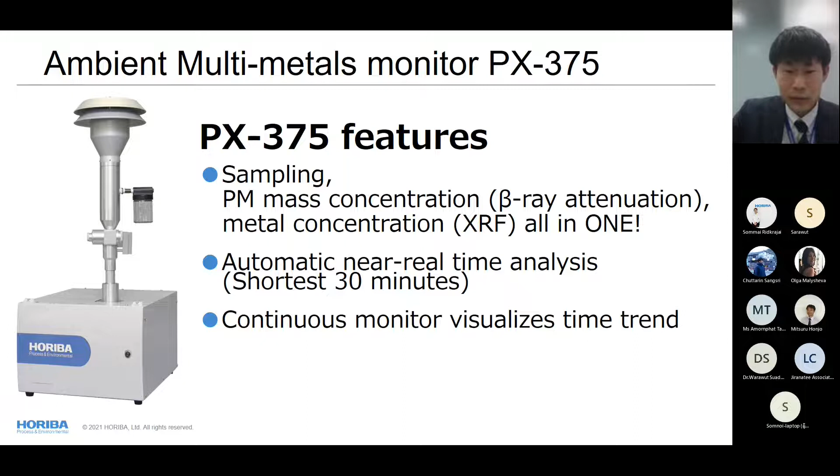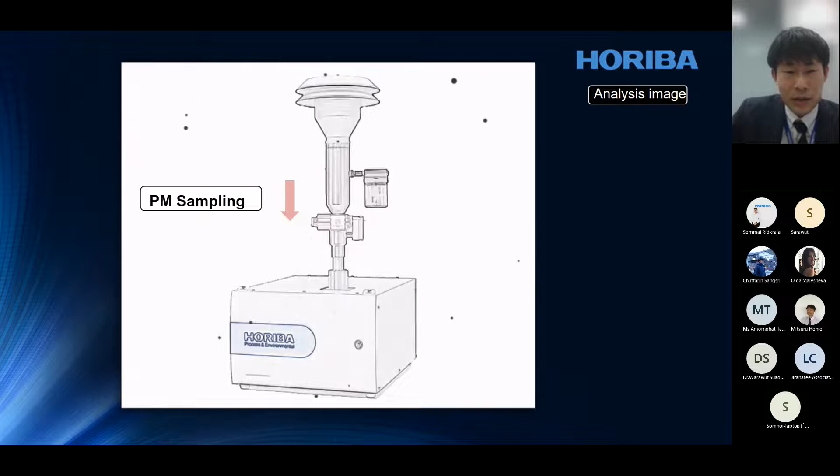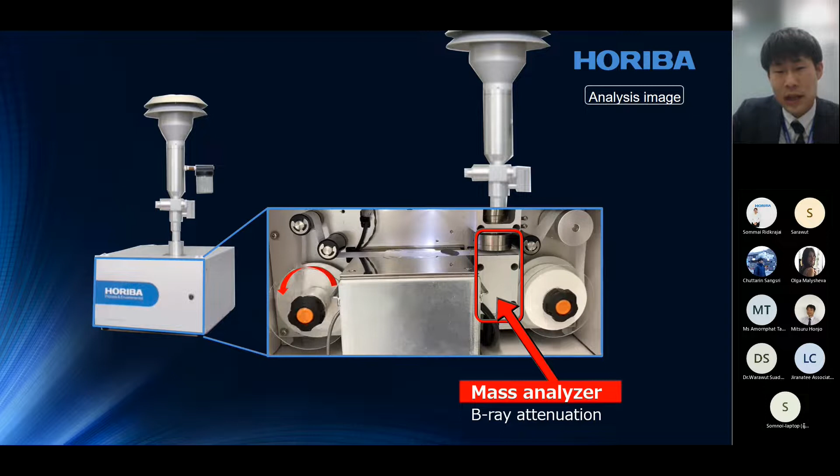Let's look at the animation and learn how the instrument works. There's always PM pollution in ambient air, and it's taken in from the sampling head at the top. Once the PM sample is taken into the instrument, it will be trapped on the surface of the filter tape. At this location, mass concentration is analyzed with beta ray attenuation technology. Then it's moved forward to the next position, where metal concentration is analyzed with X-ray fluorescence technology.

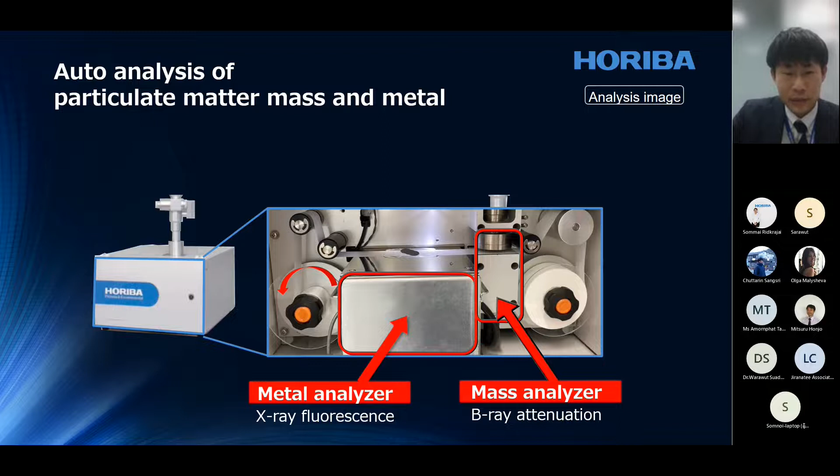If you install PX-375, you will get a lot of measurement data such as PM mass concentration and metal concentration. And if you also install other sensors like wind speed, humidity, wind direction, GPS, and temperature, you'll be stuck with tons of data.

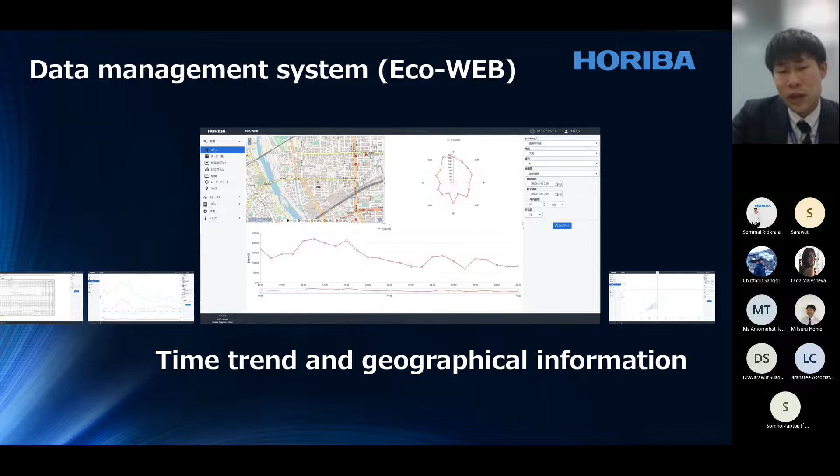And not just the instrument, we also have a proposal for a data management system, which is called Eco-WEB. With this software, you can check the time trend and geographical information too. Not just that, you can also show the time trend of multiple metals.

If you want to visualize the measurement data with the very manual method, you have to put all the measurement data into a CSV file format, and then you have to manually put it into graphs. It's such a time-consuming process.

You can also take a monthly report from the software, and together with the wind speed and wind direction measurement data, you can also visualize from which direction a particular concentration of metal is coming.

So if you put this data onto the map, you can visually see how much pollution is detected at the measurement site, and from which direction the pollution is coming. And then you can also check what facility is possibly causing the pollution in that direction.

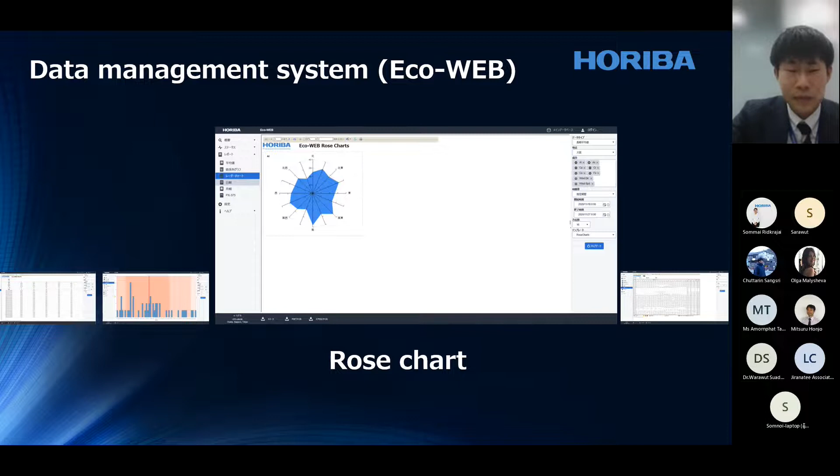Histogram data. And if you also want to put it online, you can get it online through Wi-Fi communication, and you can check this data all remotely.

Okay, from this slide, let's learn a little bit about how important the metal elements are in the total particulate matter. As you're seeing, particulate matter is composed of a lot of elements, and if you roughly break it down, you have ion elements, metal elements, and elemental or organic carbons.

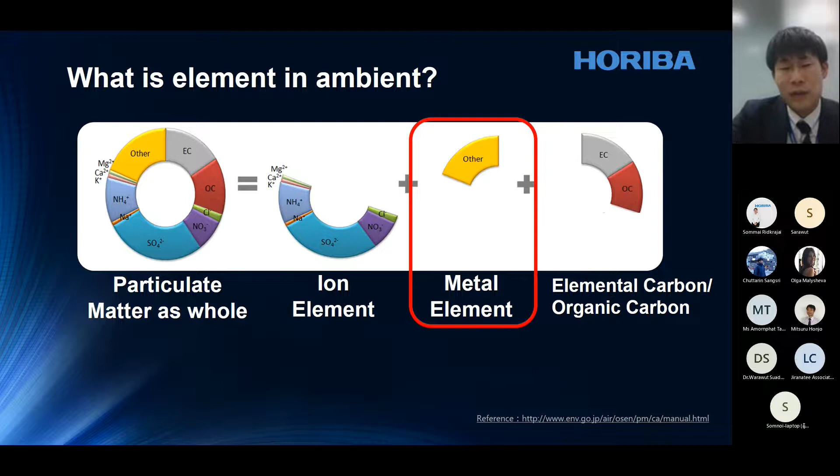The reason why PX is for metal analysis is that the metal component does not change its composition during transportation. For example, if you are monitoring SO2, the concentration will change over time during transportation, due to, for example, the sunshine effect and so on. But on the other hand, metal doesn't change its chemical composition during transportation.

So that's why they can work as good fingerprints for pollution source analysis. If the composition changes all the time, you have no clue where it came from. But if the composition doesn't change, that information is preserved from the origin of the pollution all the way up to the location where you detected the pollution. That's the very important point why we want to monitor metals in ambient air.

And in some studies, of course, the importance of metal analysis is already known. That's why other researches were taken before. But the method used for the projects in the past is very conventional.

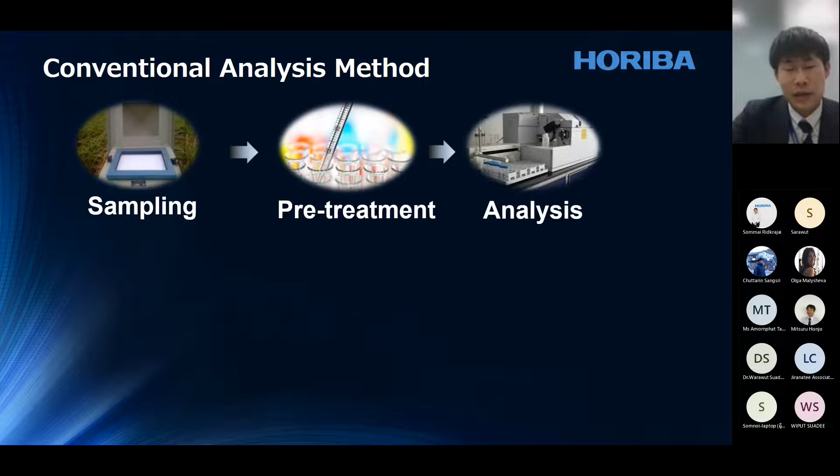For example, you have to have a sampling unit like the photo here, and then you have to take the sample on the filter and take it to a pre-treatment process. And then finally, you can analyze the sample. So as you're seeing, obviously it's an expert analysis. That's why it's expensive.

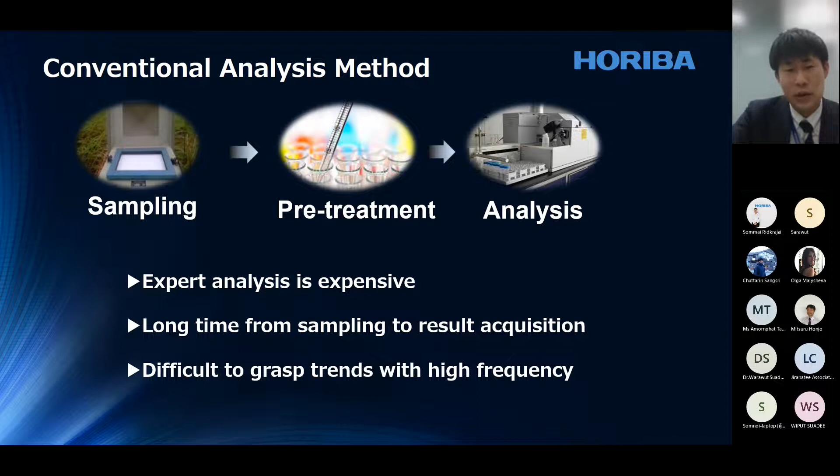It's very rare that you have the analysis instrument in your lab. So most of the cases, you have to take the sample and ship it to the analysis lab and wait for a certain time until you get the analysis results back. So this process is very time consuming. It normally takes about 2 weeks to 3 weeks. That's why it is very difficult to grasp trends with high frequency. The measurement frequency is a key point for today's webinar.

So let's look at the benefits of online XRF metal monitor. So as I explained in the previous slide, the conventional method used is ICP-MS in many cases. Time resolution wise, usually measurement frequency is 24 hours. In other words, you can only analyze one sample in a day.

On the other hand, with PX that equips XRF technology, you can analyze the sample every 30 minutes shortest. The good point about this is that you can analyze the trend of pollution by time of day. For example, in the rush hour, more vehicles are running on the highway than the normal daytime.

So there must be a certain unique rapid outbreak of a specific pollution that's coming from vehicles, for example, tire or brake. So such activity cannot be captured with a manual method, but with XRF online monitor, you can capture a short-term rapid increase in concentration.

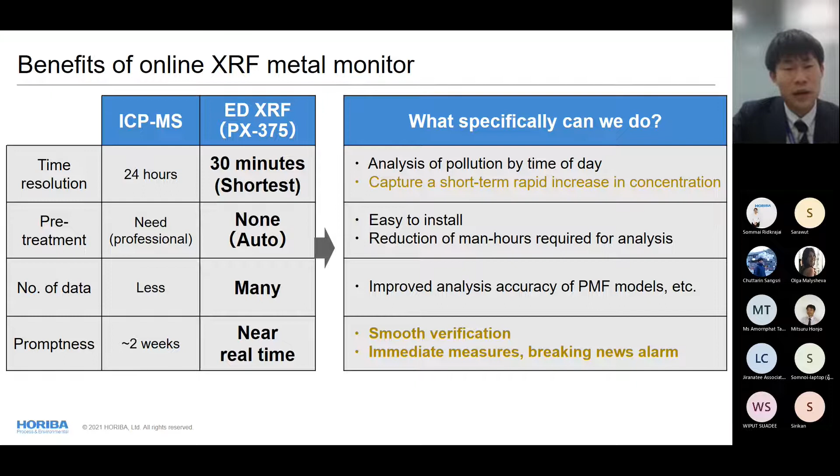For example, let's say you have an idea of a pollution analysis and you want to apply it. But if you have to wait for 2 weeks, the condition already changes and you can never duplicate the same condition again. But if you can get real-time measurement feedback, you can easily apply your idea and verify your idea quickly. So with the new technology, you can do something you were never able to do before.

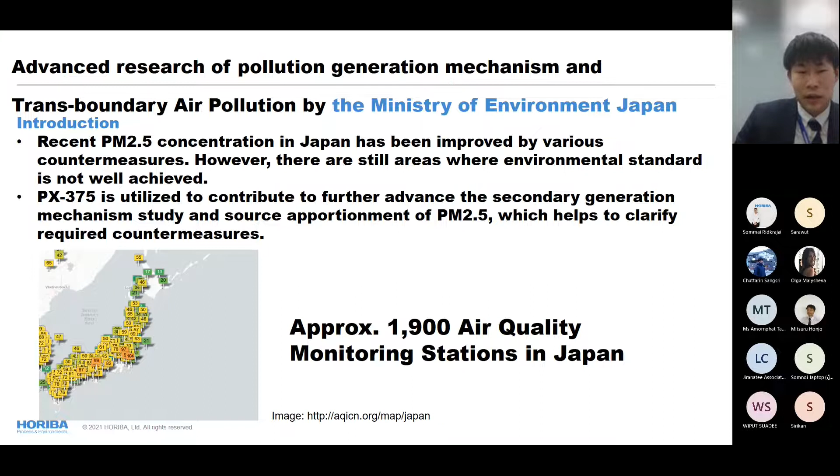And we are successfully improving on the PM 2.5 concentration overall. But there are still some areas where the environmental standard is not achieved for short time periods. The Ministry of Environment Japan wanted to learn the mechanism of how we can possibly improve the rest of the areas. So PX was installed in 4 locations in Japan, as you're seeing on the map here.

The previous challenge for the customer was a limited number of analysis data from the manual method. And that's why it was difficult to capture rapid outbreaks of a certain metal concentration. And this was a case where the benefits of the instrument are best matched. So PX provides you multi-metal monitoring continuously, simultaneously, and that was very important information for learning further the contamination generation mechanism.

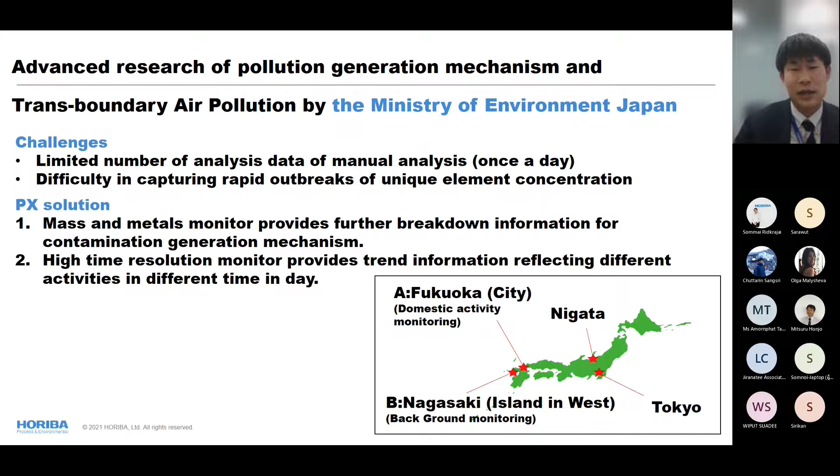Okay, let's move on to the next case. That was a wide area pollution analysis research by analysis of PM2.5 high concentration events by simultaneous observation of particle element composition and oxidative ratio. We call it OR. I think you will find this approach very unique. It's research taking place in Japan, and in this graph the black graph is PM 2.5 concentration, and the red graph is the lead zinc ratio.

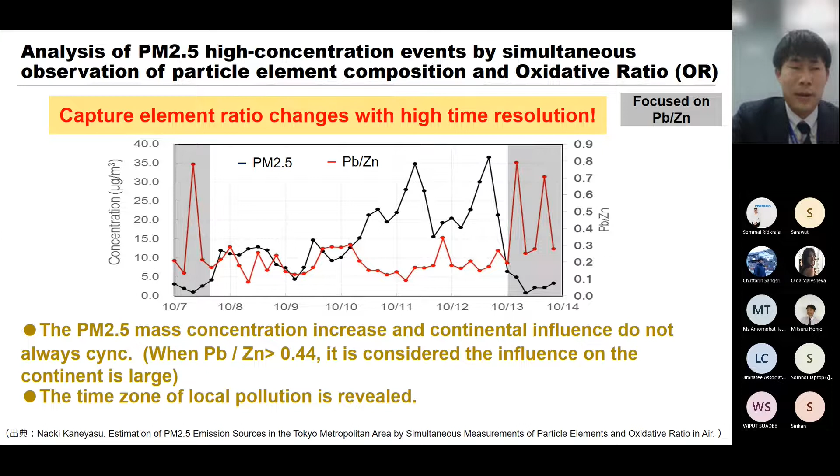Usually, when the lead zinc ratio is higher than 0.44, it's considered that coal firing facilities from overseas are affecting greatly. But when you look at the red graph getting close to a lead zinc ratio higher than 0.4, the PM 2.5 is not really increasing. So this study was an example of proof that the conventional analysis approach still includes room for improvement.

And not just the PM metal analysis, the researcher here also applied another theory. It's OR, oxidative ratio. Similar to the lead zinc ratio, certain combustion fuels have OR features. For example, if you use LNG for your fuel, the OR ratio will tend to be closer to 2. If you're using LPG, it's 1.4. And if you're using coal as fuel, the OR ratio is low.

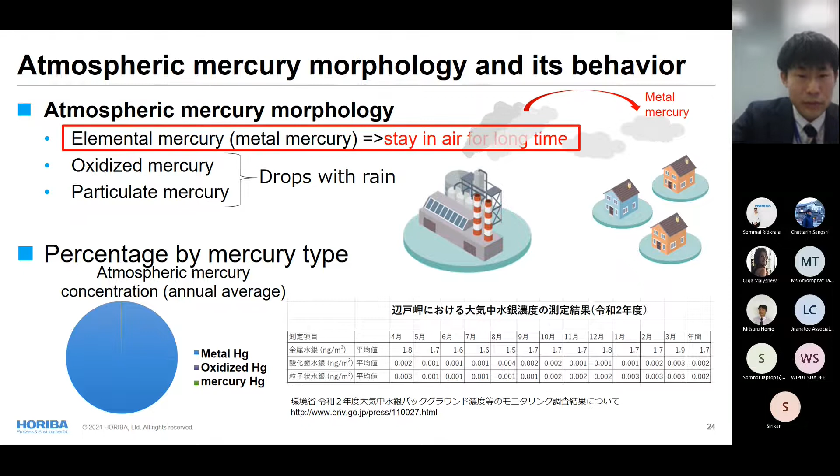Metal mercury makes up most of the percentage of mercury in ambient air. So basically, if you're monitoring metal mercury, you are covering the behavior of ambient mercury mostly. And yes. Yes, and in the research before, of course, mercury in ambient air was monitored.

And recently, some suppliers also have continuous ambient mercury monitors, but they're only meant for mercury monitoring. So just to check the health impact of mercury, it's good enough. But the point is, if you have additional information on the other metals, you can conduct a source apportionment approach. You can learn where the mercury is coming from.

Let me explain how it is in this slide. For example, I picked up some of the representative indicators for each mercury source. Major mercury sources are coal firing facilities, the cement industry, incinerators, or sometimes heavy oil combustion. So let's focus on the coal firing facility and cement plants today.

I put the measurement results of mercury right here, and we want to know: is this mercury concentration correlating with the coal firing facility or the cement facility? For the coal firing facility, as we learned earlier, we can use the lead-zinc ratio. And for the cement plant, we can use the concentration of calcium as an indicator of the industry.

If you look at the time trend for the first event here, the mercury concentration increase is correlating with the lead-zinc ratio. And the second event is correlating with the calcium ratio. So even though you can only see the mercury concentration increase in this time span in one day, if you look into the composition of metals, you can learn the first event was actually affected greatly by coal, and the second one was affected by the cement facility. So those are the cases where metal concentration information is beneficial to you.

The next case is a little bit related to the private sector. It's fence line monitoring and visualization of metals and mass concentration together with wind speed and wind direction at a steel plant. The situation was bad. The residents had health damages from PM, and it's very common that residents report to the regional government, for example, for compensation. Everyone knows when PM concentration is high because you can visually see the dust. But no further information was available because they only monitored PM mass concentration.

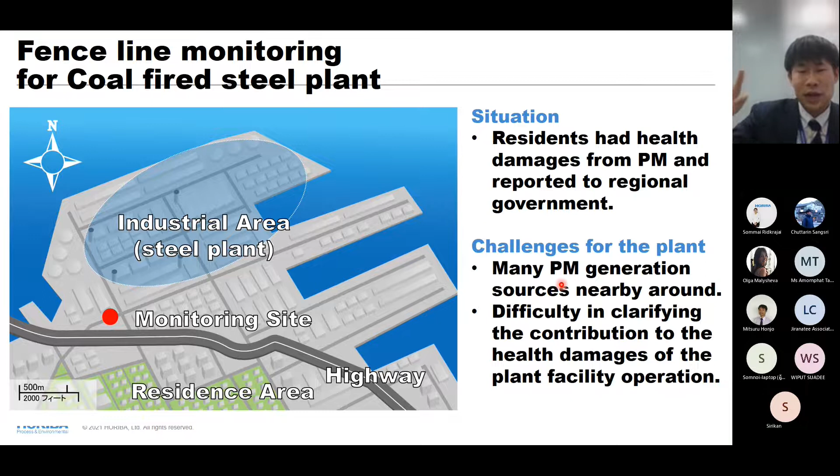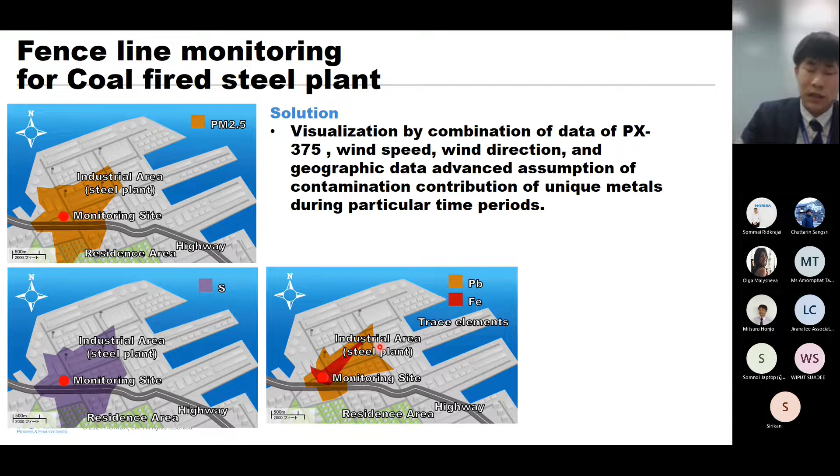So just like this, the plant operator can get an idea of the breakdown of the PM, and based on that breakdown information, they can make connections and correlations with the pollution that the plant, in this case a steel plant, is generating, and the pollution effect coming out from their facility, so that they can draw a line: this is the responsibility of the plant, and this is not the responsibility of the plant. It was a case for the private sector.

I think this is the last application case study. It's source apportionment with positive matrix factorization. It's called PMF, and I think some of the audience today are familiar with it. It's a commonly applied data analysis approach in the pollution source apportionment research domain, and it will provide you, in this case, the PM contribution ratio of different types of generation sources for a given time period.

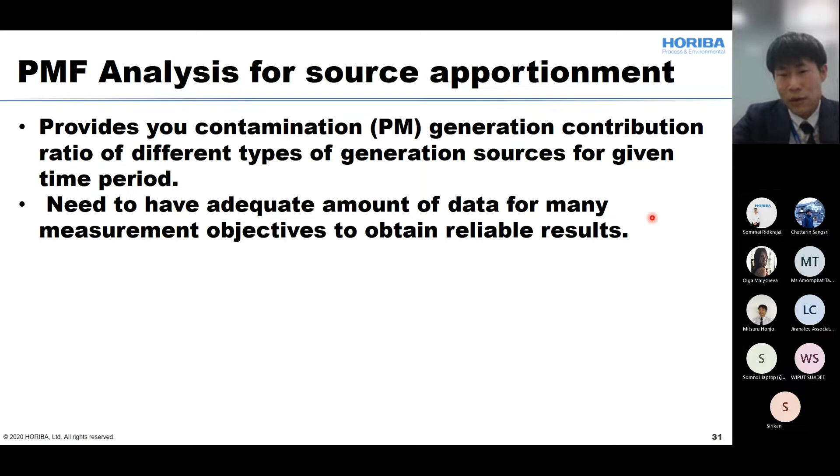In order to make this work, you have to have an adequate amount of data for as many measurement objectives as possible with reliable accuracy. So in order to apply the analysis method, we actually prepared a HORIBA AQMS, and installed the PX-375, and also the air pollution monitor AP-370 that we use to monitor NOx, SO2, CO, ozone, total hydrocarbons, and so on.

And we use the measurement data of HORIBA AQMS for PMF analysis. It's a little small, but after you apply the data to the PMF model, the model will profile the pollution source into a number of factors, and a factor stands for, for example, a category. So the PMF categorizes the pollution source into groups. So please read factor as category here.

So let's look at category number 1 here. As you can see, CO and SO2 concentrations are high. Just for your information, the blue bar here stands for concentration of the parameter, and the red square stands for percentage of the species. So if you sum up all the red squares, that will be 100%. If you look at all the red squares for category 1, those are the highest, I think. So SO2 and CO are the significant indicators for category 1.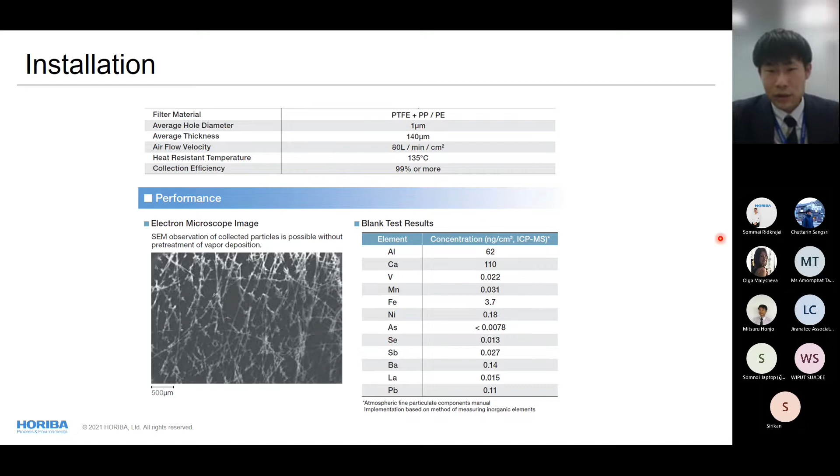Okay, I think I successfully replied to the pre-posted question. Yeah, thank you very much. And now, any other questions? We have one question in chat.

Is PX375 used for compliance monitoring in Japan, such as air quality standards for PM2.5 or metals? Okay, let me rephrase. Sommai-san, you wanna lead, or should I just continue? Yeah, continue with the question in the chat box. Okay, so a question in the chat box: is PX375 used for compliance monitoring in Japan, such as air quality standards for PM2.5 or metals?

Honestly saying, there is no continuous air metal monitoring standard in Japan currently. So in a simple way, the instrument is not compliant to the standard, but that's because there's no standard. You mean that in Japan, you have the PM2.5 standard, right? But no metal quality monitoring standard. Oh, right. And what about the PX375? Can it be used for PM2.5 or not? Or just metal analysis only?

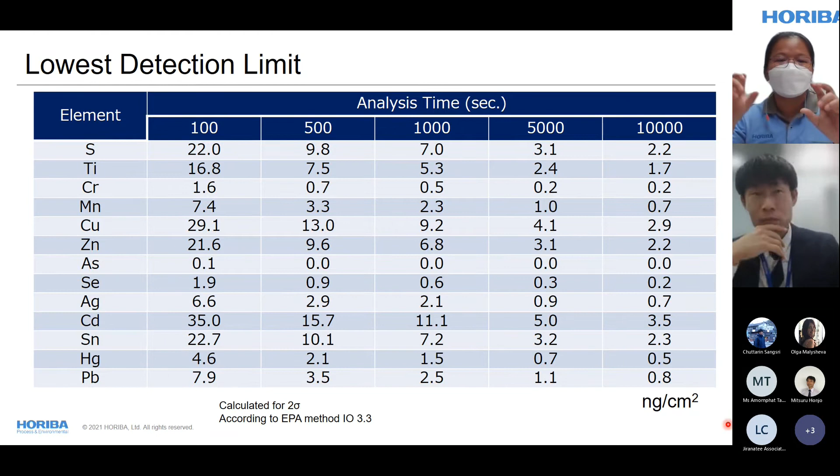Yeah, we have some research tests, right? So what about the previous presentation? You have shown some information comparing ICP and the PX375, right? Right. The Ministry of Environment case, I think. Yeah, this is also one of the studies. It's all Japanese, but you can see the result on the web page of the ministry. Yeah, I will send more information about the research, in Japan and some cases in China that I found in public white papers. After this, I will send it to Khun Amornphat again. Okay.